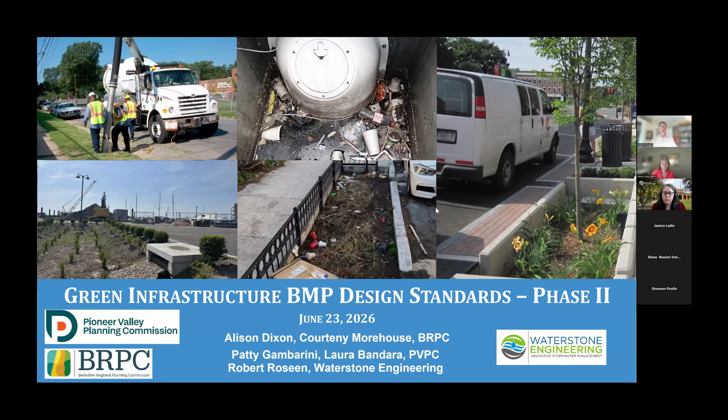So what we're going to do today is review phase two of the Green Infrastructure BMP Design Standards, which is essentially a library of relatively simple green infrastructure designs intended to be off the shelf - things that a road agent or highway superintendent could implement, simple drainage infrastructure elements that don't necessarily require heavy duty engineering.

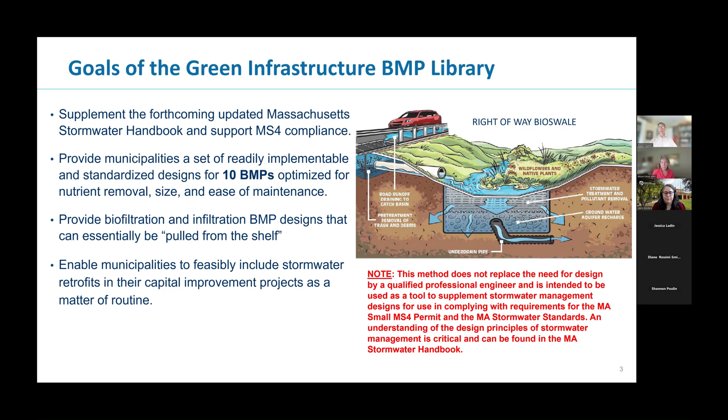What you'll see in the library is 10 standardized BMP design templates. I'll go through these - they include elements for different catchment areas, for different sizes, tables of the BMP dimensions, and information about BMP performance for removal of contaminants, things like nitrogen and phosphorus, estimated costs of construction.

It's important to understand all of this stuff comes out of the Stormwater Center BMP performance calculator, which, for those of you deep into the MS4 permit, you'll see is one of the resources that the MS4 permit offers - that and the BMP performance curves.

We talked about pre-treatment in there, online versus offline systems, and then different soil types, from the sandy soils to the D soils. We'll get into all of that.

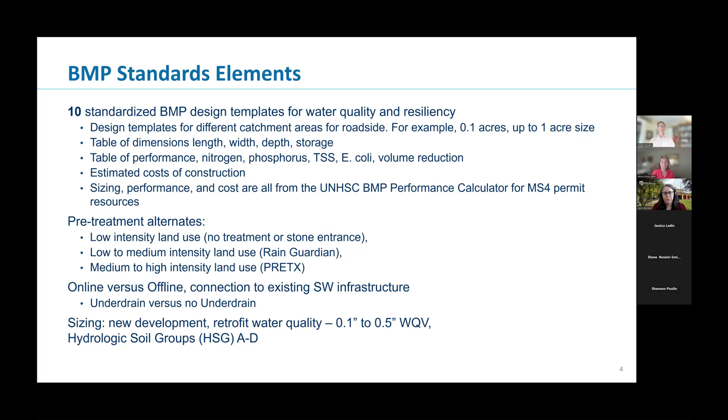So we had the first phase of this library where we did the first 5 BMPs done in 2023. Now we're doing the next 5 BMPs here in 2026.

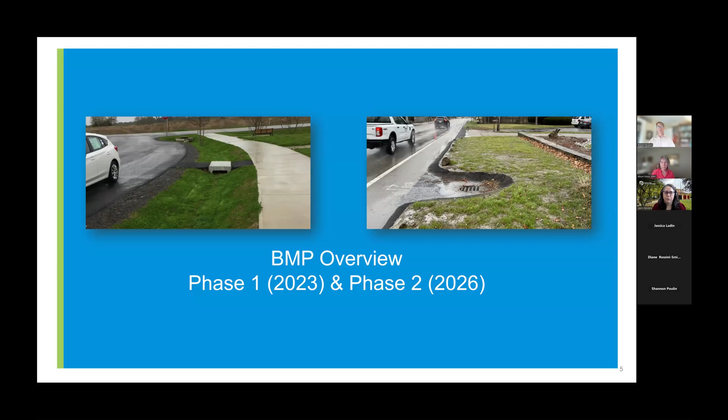The BMPs we're talking about include, on the left, a grassed bioswale - a very simple design intended to go in the right of way. This would be just a depression on the edge of the road, and depending on the level of intensity of the need for pretreatment, you may or may not have pretreatment in there.

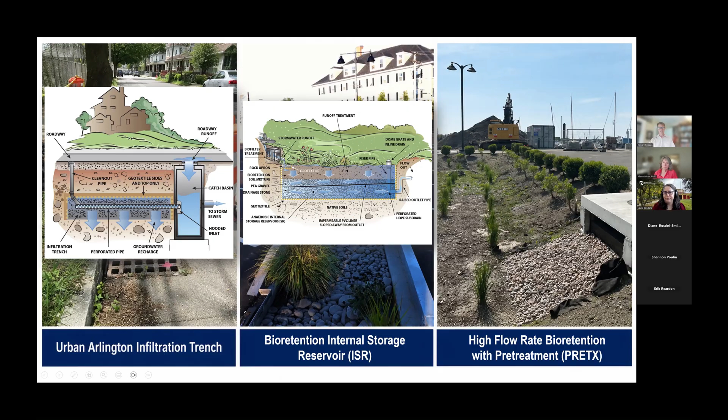But the other important part to understand is when you have a high flow rate media, it's much more prone to clogging, so they're much more sensitive. So the pre-treatment component of that is very important. What you see here is a pre-treatment system on the front side, a PRETX system where it's screening out trash and debris before it goes into that.

And so often what you'll see is you'll have the pre-treatment systems, and then you'll often have a structural underdrain. So what they'll do is put in things - basically they're like chamber systems. They provide storage underneath the system and greater opportunities for infiltration. So the cost is a little bit higher, the functionality is quite a bit higher as well. They're really great systems.

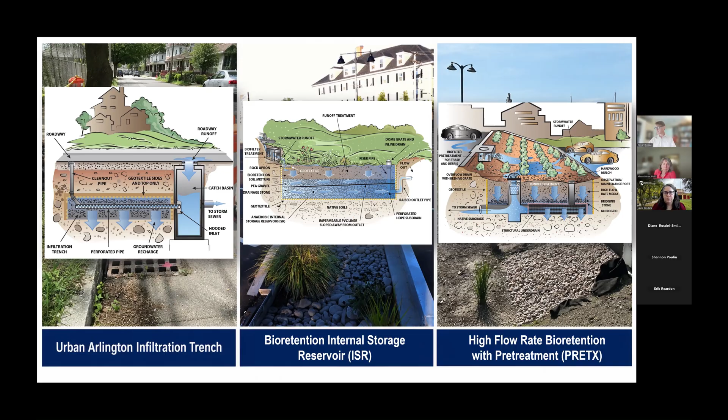And then we're adding some fairly simple systems here. Rooftop infiltration with pretreatment, so incredibly low cost. This is an example of a system being built as part of a residential subdivision. Every house in this subdivision has this, and I don't remember the volume of stone, but let's say it's maybe 3 or 4 or 5 yards of stone. So the cost of stone is maybe $300.

And then you have somebody to dig a hole and wrap it in fabric. So these systems are often going in for $2,000 to $2,500 per household, and they're managing up to the 5 year, even 10 year storm event in the stone. Very, very simple, very important,

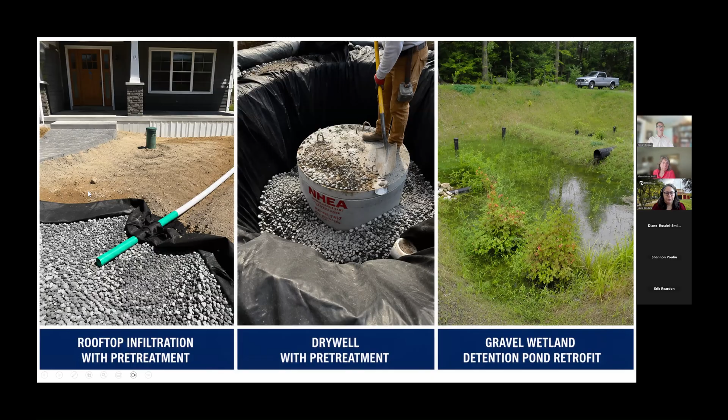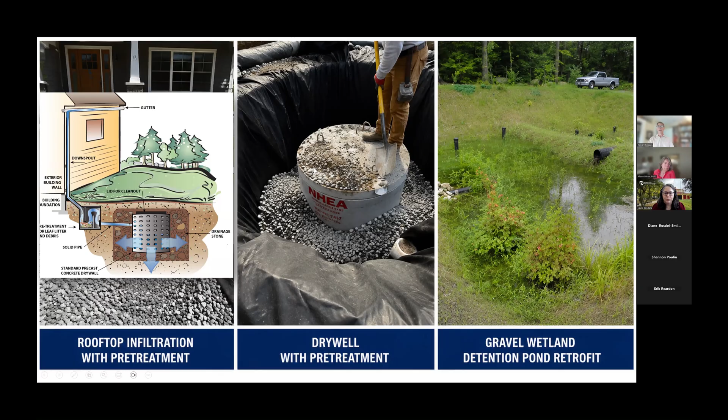and really easy to implement. Same thing with dry wells - let me go through this. This would be for a residential setting or something with just clean rooftop runoff, so kind of a very low trash and debris load. And then this system is more of a dry well with pretreatment, which might be intended more for parking lot runoff where the pretreatment demand - the trash and debris load - is going to be a bit higher. You wouldn't put it straight into a dry well or an infiltration trench; it really requires a higher level of pretreatment on the front end.

And then lastly, these are retrofits. Gravel wetlands - we spoke about these a little bit earlier. These systems can be great as a retrofit of existing ponds. Ponds have been around forever. If you have locations with dry ponds, a dry pond is typically designed for flood control, so they're often sized for the 10, 25, even larger storm events.

And so you have a large basin, an existing area, and then in the corner of it where the outlet is, you can retrofit it with these gravel wetlands. With a slight modification of the outlet control structure, you've changed your pond from having a modest level of water quality treatment to being one of the highest performing systems we've got, which are these gravel wetlands.

They're easiest done for dry ponds, but if you had a wet pond you could also do it there. You would just need to fill the wet pond, get rid of that permanent pool of water, which isn't really a big deal other than the fact you need to bring in fill. But in terms of flood storage and water quality treatment, there's nothing lost - we end up increasing the overall level of performance.

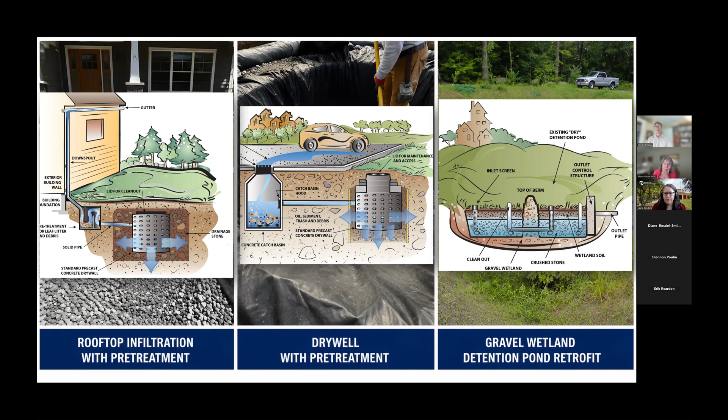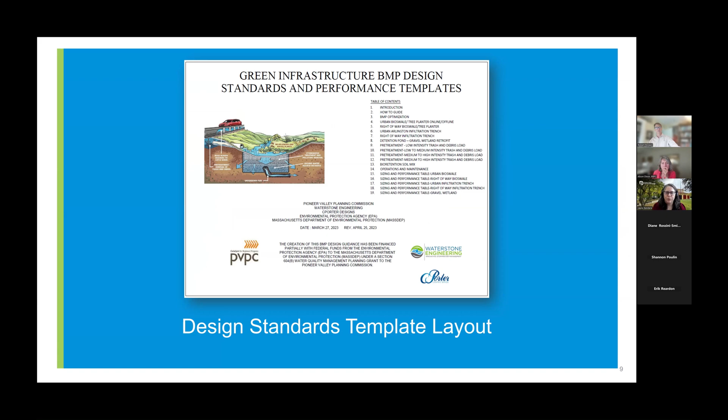Okay, so now we're gonna shift into what the library itself looks like, to give you a sense of how you will use this library and implement it in your day-to-day operations. So this is what the 2023 library looked like - it will have a facelift for the 2026 library. But this is an example of one of the sheets you would find in there, the urban bioswale or tree planter.

So what you see is you have a plan view on the top, then you have these sections through the middle. This gives you almost everything you need to build the system. There are specifications that go with this, dimensions, etc. Some of this is followed up in the sizing tables, which I'll show you next.

As an example, what you see here is it's showing on the top, for example, this would be implemented in a sidewalk, so you'd have a sidewalk cut. You then would have a fence. They don't always have to be fenced, but if you want to do that, you can have a fence around that. It really depends on the depth of the system.

This particular system has the option of being built in an online or offline configuration. So if you're in an area that has a lot of catch basins or existing stormwater drainage infrastructure, you can have these under drained and tap into the existing storm drains, or they can be done where there's a curb cut on the front and a curb cut on the back. So when they fill, they simply bypass through the system and back out, and flow down to the next storm drain or whatever else is in the roadway.

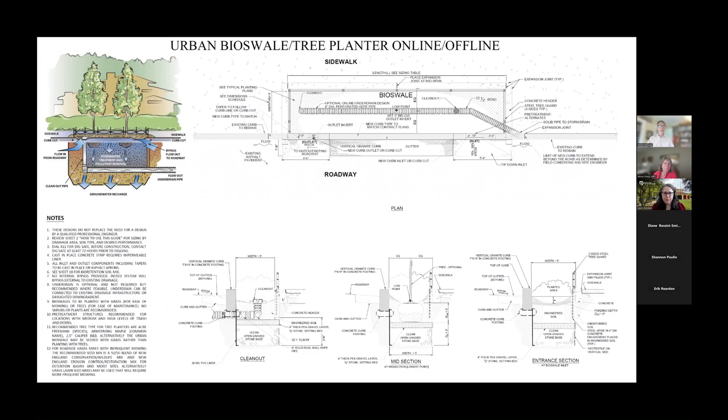But first, I want to talk about the considerations that go into this.

So first I want to talk about considerations that you have to do when you're looking at the sizing of these. Some of you may know this, but it's important to understand the context of why we're doing this and the limitations that municipalities experience for budget and otherwise.

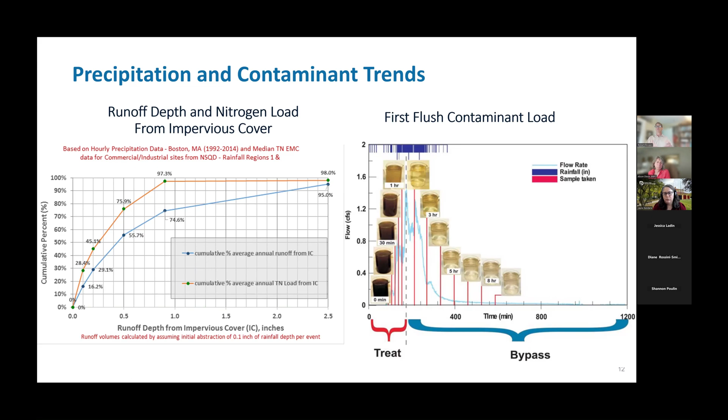This phenomenal figure was made by a guy named Masoud Kayhanian at UC Davis, a wonderful stormwater scientist, and they monitored this for Caltrans. Their storms are a bit different than ours because their climate's different, but you can see the storm that happens in the beginning—these are real pictures—it looked like tar, and by the 30-minute mark it's starting to clean up, and by the 8-hour mark it's completely clear. So the concept is the same; the timing is different. In our environment in the Northeast, where it rains frequently, we get most of our nitrogen and phosphorus in the very beginning of the storm.

So now let's talk about this from the concept of BMP optimization. BMP optimization is the idea that you're going to have a lot more bang for your buck if you're building systems sized for smaller storms rather than larger storms. So I want to show you how that actually works out in terms of BMP performance.

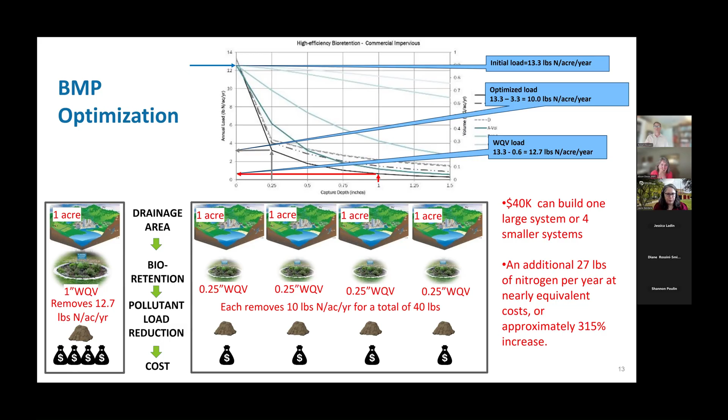So whether people realize it or not, it's actually in the MS4. There's a requirement in the MS4 in section 2.3.6, which talks about how redevelopment needs to be optimized for nitrogen and phosphorus. It goes through that description. And I'm going to show you a really quick example.

I'm not going to spend a lot of time on this, but this is an example of a site that was actually built. We had one system that we sized for a 1/4-inch water quality volume, and it was treating about 4.5 acres. We had another system we designed for 3/4 of an inch of water quality volume for about 1.6 acres.

We were able to achieve, in that same example, a 76% nitrogen reduction and a 95% nitrogen reduction for those two systems at a relatively low cost, $34,000, at some really good costs.

If you did a lot of this, you'd recognize that nitrogen treatment at a wastewater plant, to get down to about somewhere between 4 and 8 milligrams per liter, is costing about $3,000 per pound of nitrogen per year. So when we get below or around $3,000 per pound of nitrogen, we're doing really well.

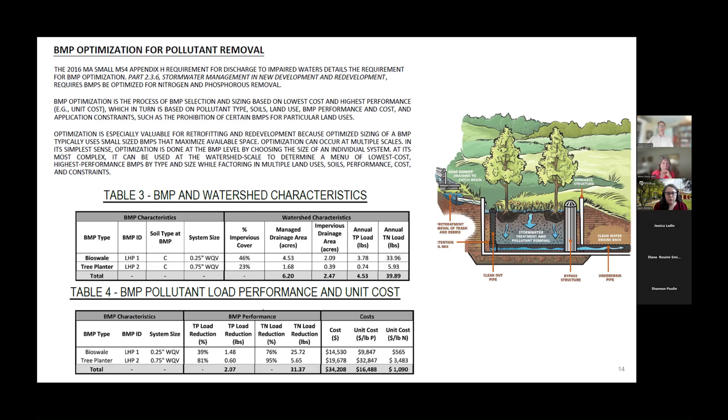Okay, so now we're going to go into the design method. And if anybody has any questions, I know it's a lot of information, but this is the context and sort of the underpinnings for the design library.

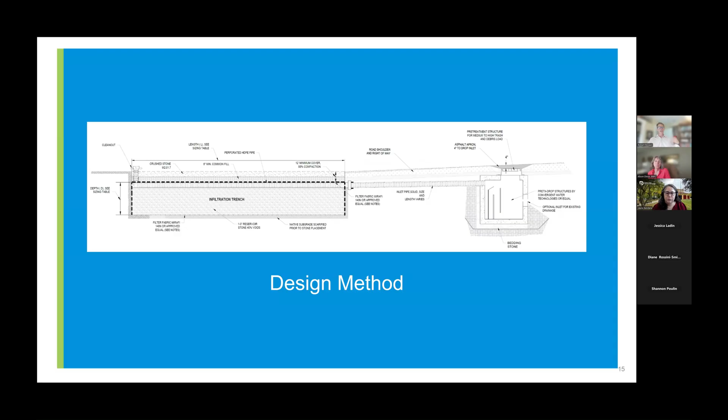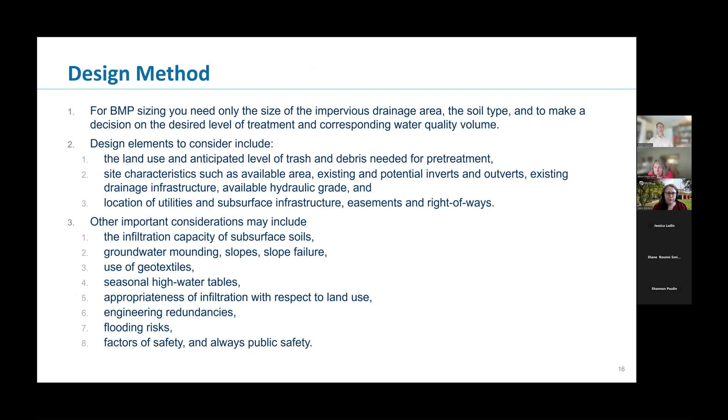So the design method, basically, you're going to go into the assessment of the... actually, I'm going to skip past this, we're going to do it here. You're going to go into the...

You're going to go into the evaluation of the location for stormwater management retrofit. Allison, did you have a question?

So to do that, you're going to assess where is this thing going to go. Is it in the right of way in a suburban or rural area, on the edge of the road where we have lots of room, or is it going to be in more of an urban setting, where we have less space to operate and we're probably dealing with a lot of utilities?

We need to consider our setbacks for things such as septic systems and drinking water wells, or from resource areas, water bodies. Are we within the 100-foot setback of a protected water area? Are we triggering the Wetlands Protection Act?

Then we need to determine our drainage area, or more precisely, our impervious cover drainage area. Then we would look at our hydrologic soil group and our seasonal high water table. Sometimes this involves test pitting, but if it's in an area you work in a lot, it's not always necessary. You can get a fair amount from the NRCS web soil surveys, or if it's an area you know, you may simply confirm it during construction.

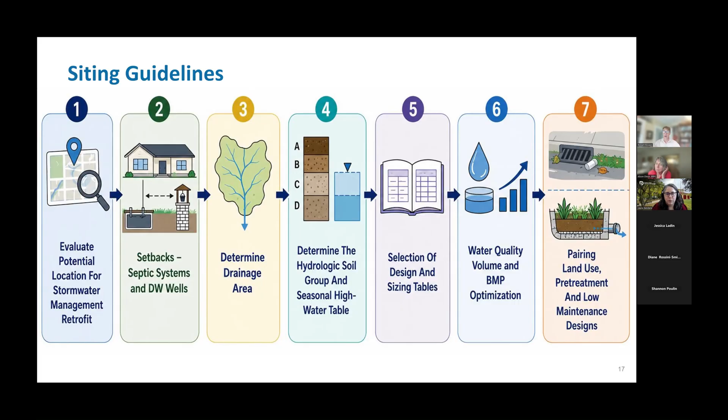So first, I want to go into an example. I'll do this example for you, and then we're going to try to do a group exercise and get folks to weigh in here. So I see Jessica and Diane - I'm going to put you on the spot if you're interested, and if not, that's fine. We'll get out of here a little early.

So the first one is an example of an urban bioswale retrofit. What I want you to think about here: imagine a design scenario in an urban environment where we have a two-lane roadway, roadside parking, sidewalks, curbs, gutters, and existing drainage infrastructure.

So in this case, what I want to do is pick an offline urban bioswale with no underdrain. Why would I do that? It's going to be very close to what you see in the bottom of the system here, and the reason it's offline is because I'm going to try and limit cost, if I don't have a lot of money to spend for this particular example.

So what I'm going to do is have a curb cut at the front of the system where it's going to allow water to flow into it, and then when the system reaches capacity, it's going to exit through a curb cut at the back of the system and drain right back into the road, and maybe another 100 feet down it'll go into an existing catch basin. I'll have a pre-treatment system ahead of it to capture all the trash and debris.

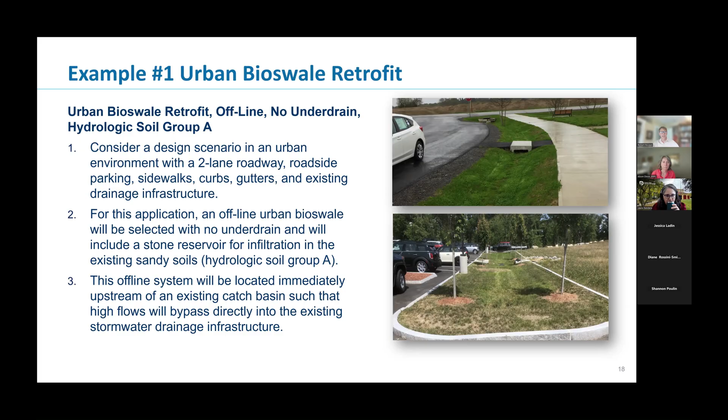Now I want to show you how you would use the sizing table. Remember that big complicated chart I showed you with columns of BMP and drainage area? This particular example I'm picking for a half acre impervious area, so half acre road runoff. That's probably a two-lane road, most likely crowned in the center, so I'm just doing one side, and often we have 200 or 300 feet between catch basins. This instance is for hydrologic soil group A, so sandy soils.

So we have our impervious drainage area, then the way we read these is you have your BMP sizing. We'll talk about that in depth, but I want to go through an example here. There are three elements: your treated area equivalent, so in a 1 inch water quality volume you're essentially treating the entire impervious area, down to different sizing — 3/4 of an inch, half an inch, and so on — and what the treated area equivalent and depth of runoff treated would be.

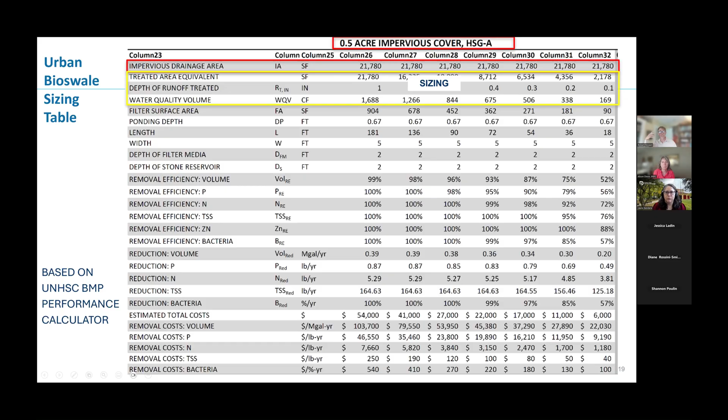So, remember back to the optimization example? Am I sizing it for a 1 inch water quality volume, or something less, anywhere from 1 inch down to a tenth of an inch? And then what that corresponding water quality volume will be — what is the size of the capture volume in that BMP. For a 1 inch, it's fairly large, maybe 1,600 cubic feet versus maybe only 169 cubic feet. So that's where the sizing element gets in, and we'll go into this — this will hopefully begin to make sense.

So what this shows you is if I pick something for a 1 inch storm, the length of my bioswale is going to be 180 feet long, which might be fine in a rural area with plenty of room along the road shoulder. In an urban setting, it's less likely. Down to a tenth of an inch, I might be able to do this in as short as 18 feet. And then we've standardized the width and the depth of these systems.

Now, we haven't done this in the sizing tables, but you could recalculate this on your own if you said, okay, I'm going to make this 10 feet wide. If it's 10 feet wide, then instead of 180 feet, it's going to be half that distance, 90 feet. Or I want to make the depth of the filter media twice as deep — now you're changing your volume, and you can change your length too. So it enables you to rework those numbers if you want. If you're heavily reworking them, I'd recommend you get the UNHSC BMP performance calculator. We don't have time to go into that today, but understand these numbers are generated from that calculator and from the BMP performance curve and these complex models that have been run, now standardized into outputs.

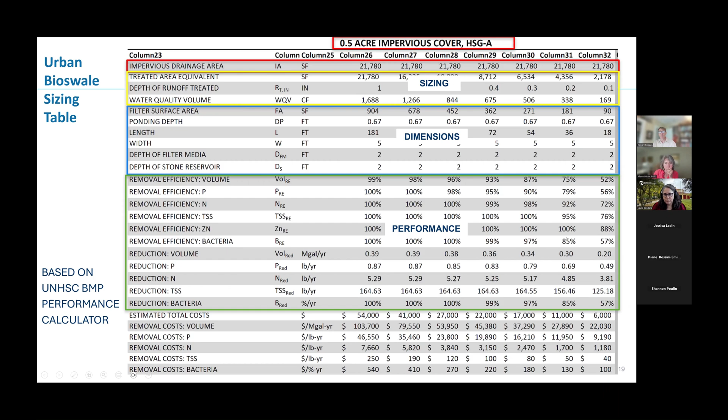Then the next piece gets into performance — what is your removal efficiency, both in terms of percentages and in terms of what your actual load or volume reduction would be. So again, our 1 inch example, I'm getting essentially 100% removal efficiency for phosphorus, nitrogen, total suspended solids. But down around the 2/10 of an inch, we're in the 80% or 90% removal efficiency range, which is still very good, and costs a fraction.

And then the last bit, the planning costs. Remember, these are not construction costs, so when it comes to bid or actual construction, you need to reassess these numbers. And by the way, these numbers are going to be updated as part of the 2026 BMP library.

And you have a cost to construct in the top row, and then you have unit performance costs. These are a bit more esoteric, but understand these are the costs of pound removed. So you might remember I told you in that prior example, we were down around $1,000 per pound of nitrogen removed.

For the urban bioswale, at 2/10 of an inch, we're down around 1,700 pounds of nitrogen, or $1,700 per pound of nitrogen. That's because in an urban setting, it's more costly. If I was in a rural setting, which was my particular example, these numbers would be about a third of that.

Okay, so now I want to run this example again. For this particular BMP in the urban bioswale setting, I'm going to pick 2/10 of an inch. In that example, I'm going to have a filter surface area that's 180 square feet. My ponding depth is going to be, I think, 8 inches. My length of my BMP is going to be 36 feet by 5 feet wide.

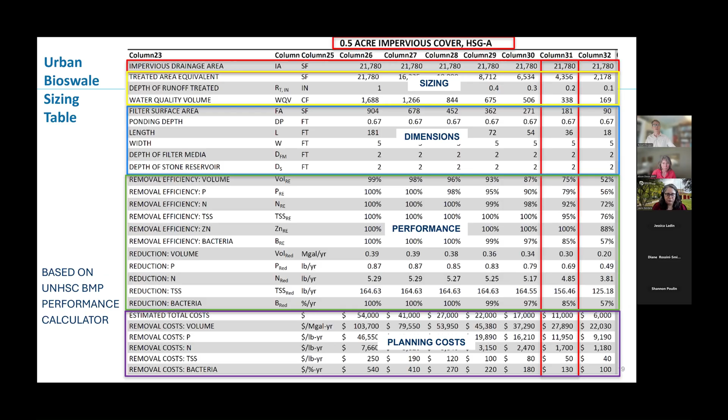So the first example I'd like to talk about, and I just built a whole bunch here, is a right of way for roadways. This was on a Mass DOT road in a municipality. Technically, the municipality is responsible for maintaining, or it's in the municipal MS4, but it's on a DOT road. So I don't always know how these things work. I know we had to permit it through the DOT, and I think the DOT is responsible for the maintenance, but the town paid for all of this. I don't know how it works.

But what I want you to think about here is we have an urban minor arterial. It's getting roughly 10,000 vehicles a day. It's a 35 mile per hour road. We routinely get heavy trucks. We have roughly 85% impervious cover within the roadways, and we're dealing with pavements, sidewalks, driveways, gravel shoulders. Oh yeah, and we're in a type A soil here.

So let's talk about this a little bit. If you think about your potential location, if you're looking at a road like this, where could you build BMPs? I can tell you that what you have on the left-hand side here is, oh, so there's a road crown. So everything on the left-hand side is going into storm drains, and they're untreated, and they're going straight out to ponds that are impaired, so they're on the impaired list. So they're getting nailed by the MS4. Everything on the right-hand side of the road is untreated and it's running down a long ways, and eventually it'll get to a catch basin, or it's flowing over the hillside down people's front yards.

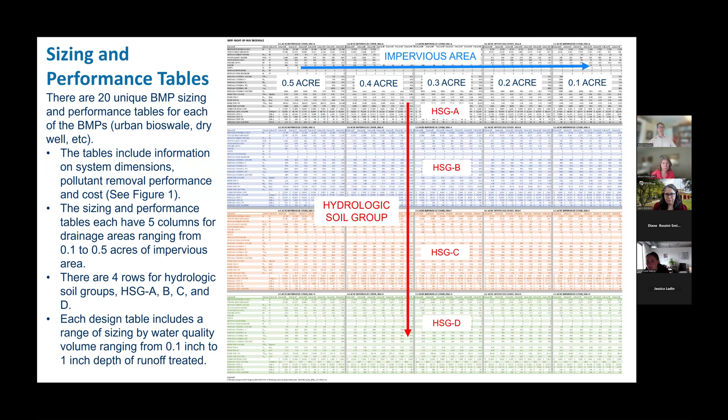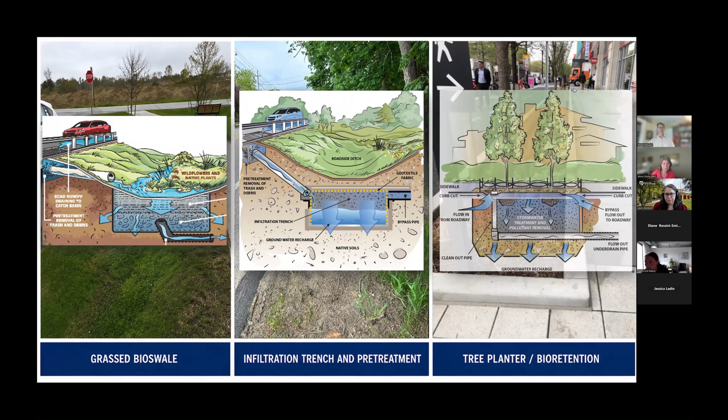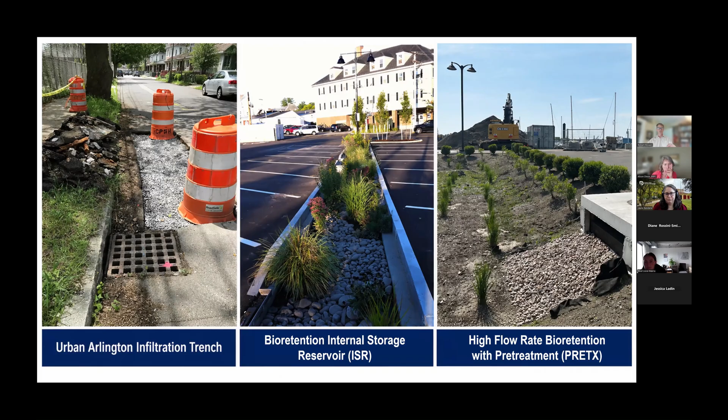Why don't I go back up. So for example, here's a bioswale on the left. We have an infiltration trench. And what else do we have? We have another one that would go below. So we only have two that are below ground surface here: an infiltration trench on the far left, the urban infiltration trench, and then the regular infiltration trench, roadside infiltration. So what do you think?

I'd almost go with infiltration trenches. Do we have the same right of way on the other side of the road, or is it at the sidewalk? It's under the sidewalk. So we do have the same right of way, but you'd have to disturb the sidewalk. I think it's 58 feet from edge to edge. You could put a 24-foot roadway in, but you'd have to break up sidewalk, so the project cost goes way up.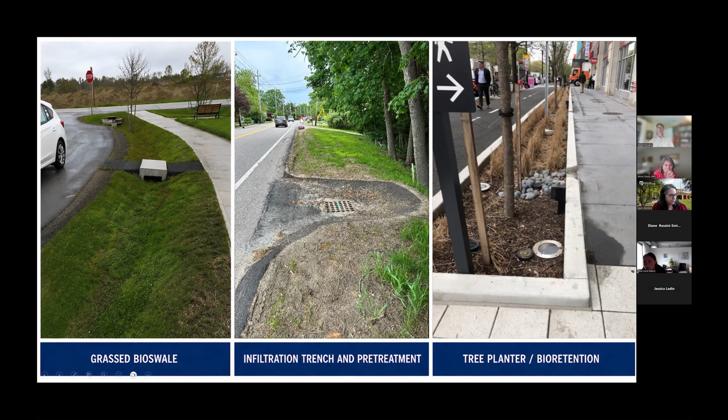So I'd almost go with maybe that infiltration trench with pretreatment. Yes, exactly. So that picture I showed you, see where this orange sign is down here? That's where they're building it. That's exactly what we chose. So we did exactly what you just suggested there. So let's get back to it.

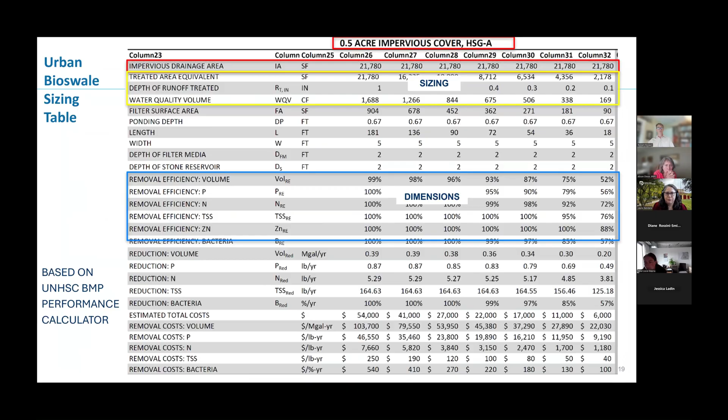This one. So the picture I showed you of the urban infiltration trench, that's about 1,000 feet behind me here. We put one in right here, I think, or maybe it's in front. I can't remember exactly where it is, but I think there's actually two in here. So, piece of cake, right? You have a catch basin with pretreatment that goes in, and we just picked existing ponding areas, where the water's standing. Then you put everything underground, resurface with gravel, and put cleanouts. So yeah, what other thoughts?

So let's think about setbacks, septic systems, drinking water wells. Any of that stuff going to come into play here? Hopefully there's no wells that close. I guess we would have to consider how much contaminants would be going in and how close the wells are. Yeah, so I think in this case, everybody's on municipal water, so there shouldn't be drinking water wells, and they're also on municipal sewer, so no setbacks here. But if we did have it, I honestly can't remember. I think it's 35 feet from a septic system, and 75 feet from drinking water wells. Does that sound right? It varies, I think that's locally determined, as opposed to state determined.

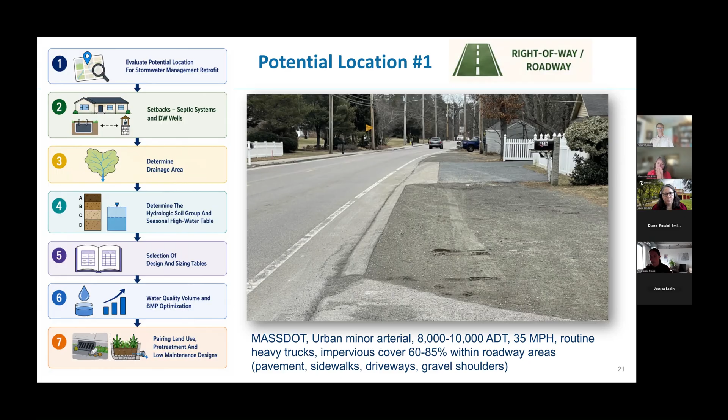In your area, do you guys do concrete curbs or granite curbs? It depends - it's a cost issue. Also, if we're doing bioretention or anything, we almost always put granite in, just because they're longer lasting, and if there's a drop in grade, we don't want to chance it with that kind of stuff.

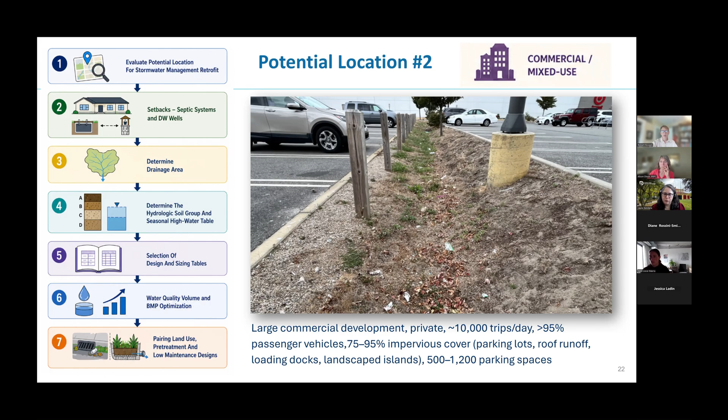So let's jump into - I'm realizing next time I do this, I'm going to sequence it differently. We're going to do that exercise after we do the pretreatment for trash and debris, because this and the O&M considerations to me are some of the most powerful things. You guys working in municipalities, this is the biggest nightmare that you worry about.

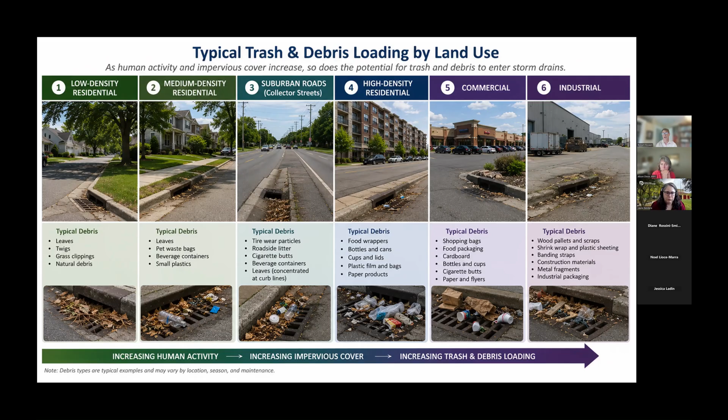Depending on where we are on this, I can't tell you how many times I've worked on projects where we've designed stormwater systems including pretreatment, where the owner, as a cost savings measure, has eliminated the pretreatment in favor of just a little gravel entrance or something because it's cheaper, and then it doesn't work.

This is where I think about the evolution of low impact development, and the analogy of a septic system. In a million years, nobody would consider building a septic system without the tank, because the leach field itself could function for a very long time if the tank is well maintained.

Stormwater infiltration is not a lot different, we have a trash and debris load. Think of your bioswale or subsurface infiltration as not substantially different from a leach field, as long as you have something that enables you to remove the trash and debris.

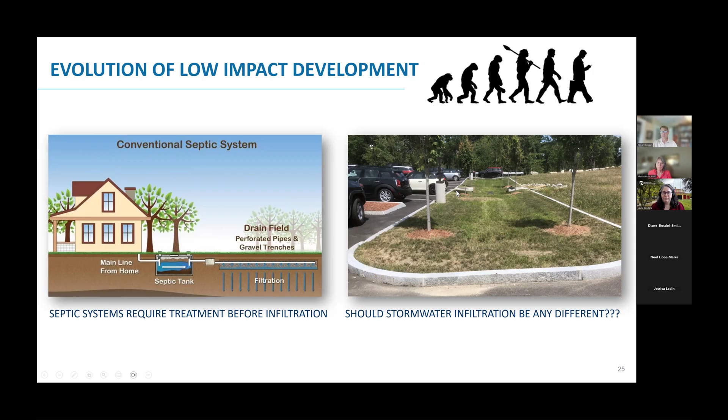This example has a pretreatment system that captures all the trash and debris off the parking lot. These were some headlines from the New York Times early on, where the city's system was called a pollution fighter, but for residents, it's an eyesore.

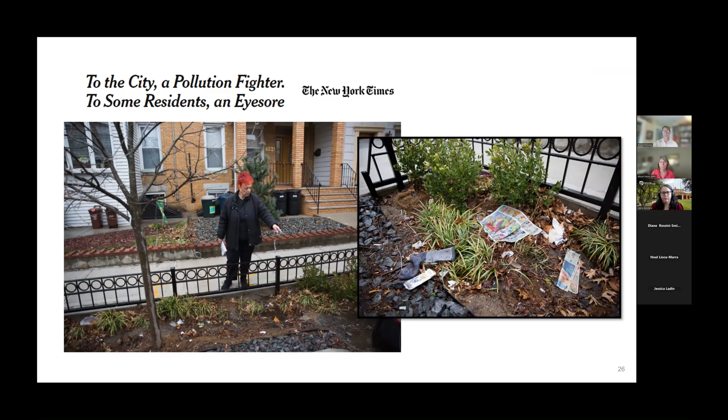Why that's important is because in a municipality, you're always playing the game of trying to get taxpayer support, and if they don't support something, you won't get money to do it. So it'd be hard to get support from taxpayers to do stormwater management that looks like this. I'm not poking fun at it, I've made these mistakes about a million times and I've just learned from them.

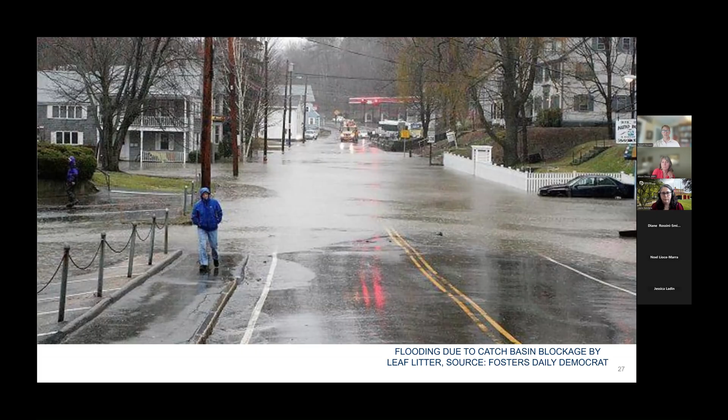I always like this example because it's not always aesthetics you're worrying about. This flooding was simply due to leaf litter out in catch basins, and it's in people's houses.

For low maintenance asset management, we need to recognize that most pretreatment is inadequate. Our goal should be to use existing staff and existing equipment, just use vactor trucks or whatever it is.

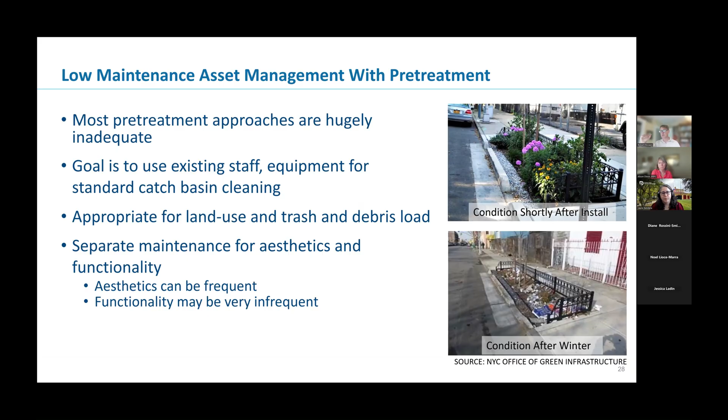Whatever we design needs to be maintainable by vactor trucks, and we want to avoid having to maintain for aesthetics. This system has to be maintained weekly or monthly not because it doesn't function, it still drains, but because it looks terrible.

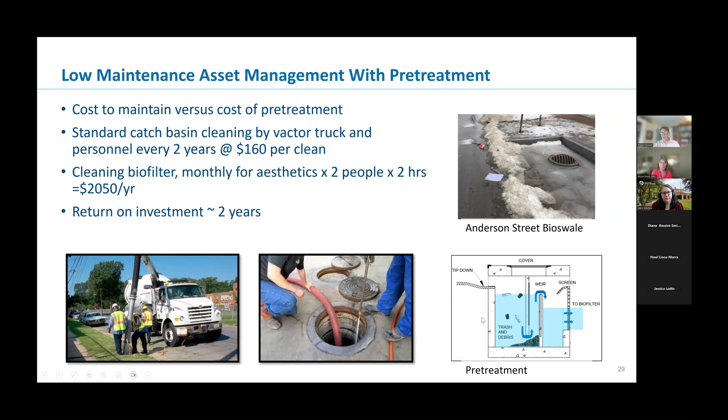As an example, we want to be able to use something like a vactor truck where you're only having to get in there every 6 months to 2 years, using a system that is capturing your trash and debris.

The different types of examples you have, your low intensity ones like stone check dams, might work fine for a rural or rural residential setting. But as soon as you get into low and medium intensity, you have to have systems that are actually capturing debris.

You see things like the Storm Sack or the Rain Guardian, these are good for low intensity areas with a little bit of trash and debris. A Rain Guardian does a great job in front of a rain garden, except it captures the trash on top of it. So if there's a high trash and debris load, at least it's not in your system, but it doesn't look good.

The good thing about a storm sack is that it's now going below ground. There's not a lot of capacity here, but since it's below ground, it's not an aesthetic problem. Then you get into the medium to high intensity cases where you have a lot more trash and debris, and these you can probably get down to a 1 or 2 year maintenance mark.

So Diane, as an example, how often in East Hampton are you maintaining your catch basins? Usually once to twice a year. Oh wow, you're that frequent? Okay, vacuuming, yeah. And for some of our bioretention, we have a couple with a pad before it, so they'll vac those out as well.

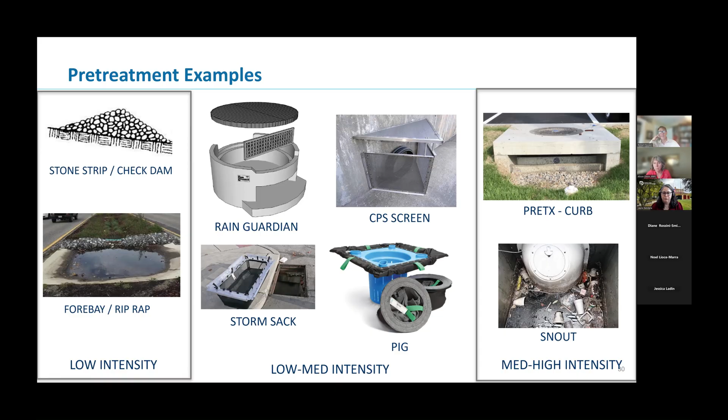Yeah, I've built a lot of bioretention that have not had sufficient maintenance. So there are bioretention retrofits you can do—or I don't mean actually retrofitting, you're not building a bioretention, but a retrofit for O&M that you can do. So we can talk about that.

So we have like a sediment pad before it with a weir, so they vac those out as well, because they're made out of pavers and they're grouted in, so we don't have to worry about backing up the sand. Oh, that's nice.

Because if you think about the O&M, ideally all you're doing is vacuuming, right? There was a guy—terrible with names—in one of our advisory group meetings who said they were doing, god, what were his numbers, like 20 a day, maybe more. That's impressive. I remember with some of these systems we were down to maybe 6 to 8 a day, so 20 plus a day is really impressive.

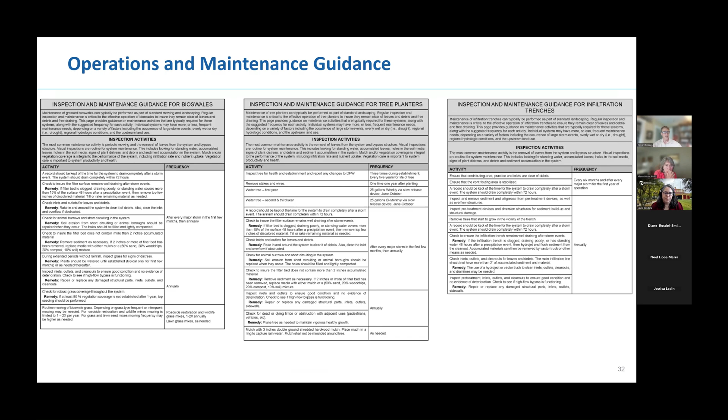And that's driving costs way down for you then. So one of the things to know with these standards is that each BMP comes with an operations and maintenance checklist—recommendations on what you're looking at, the frequency, and how that should be done.

And then the other thing to recognize is the need for construction inspection. When we think about advanced stormwater management, which is what these are, it's not just the designs, it's also building them to make sure they're done right. This particular photo is an important one because it's an example of the inspection coming too late.

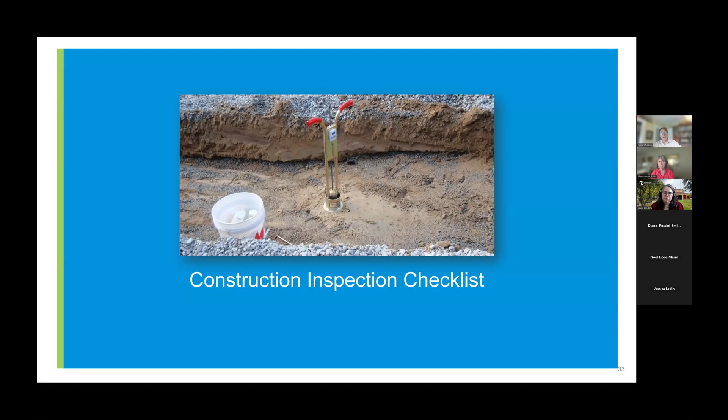We were notified by the builder afterwards, so we went in and inspected. The stone was already down, so we scraped away the stone and did our infiltration testing on the subgrade, and they had overcompacted it—it didn't drain. So unfortunately they had to scrape off all the stone, dig down a foot past the compacted layer, and retest. The infiltration was fine down there, but why that's important is because had we not done that, the infiltration BMP never would have worked.

So what you will see is a construction inspection checklist. They're all fairly easy, but they're things we can all do. Depending on the level of complexity, you'll have pre-construction elements, excavation elements, elements of how the structural components are going together, evaluation of your select material—what does the stone look like, is it clean, filter media specifications, things like that—and then all the construction completion elements, sign off and evaluation, all that.

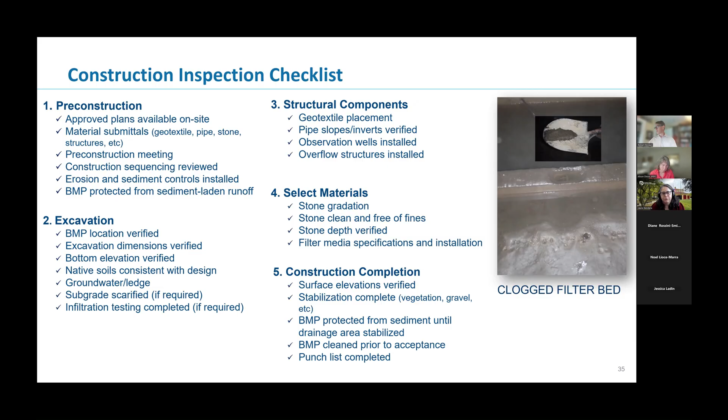So what else have we got? Okay, lastly, I want to talk about some resources for you. We have the phase one BMP design standards currently located on the Think Blue Connecticut River website, and when this project is complete, we'll have a new link for both Pioneer Valley and Berkshire Regional, with the revised and updated standards.

You can also contact me if you'd like access to the CAD files, if the standards themselves aren't sufficient and you want to modify the CAD files and do whatever else you want with those.

There's also the UNH Stormwater Center. You can get access to the BMP Performance Curve Calculator. There are some other links that are out there through the MS4 permit. And then, of course, the planning commissions—you can contact them for stormwater support.

Lastly, I'd like to acknowledge our advisory group, both from the Berkshire region and the Pioneer Valley. Your input has been exceptionally helpful. Over the years, the different designs I've done, I learned early on that engineers are very good at solving one problem and creating two. So working with the people who are building these systems and the people who are owning and maintaining these systems helps us come up with designs that are practical, feasible, and usable. We're very grateful for all of that.

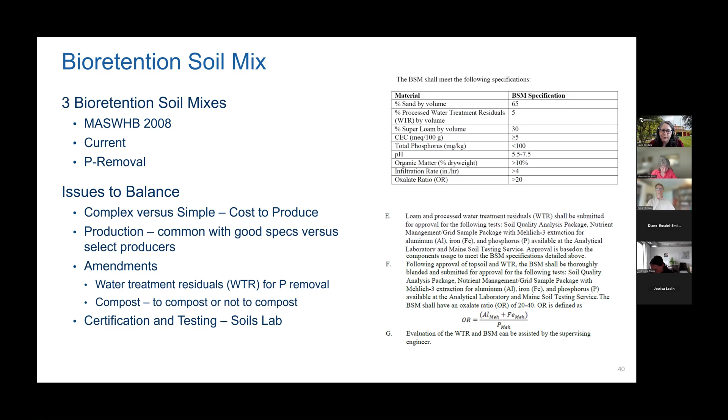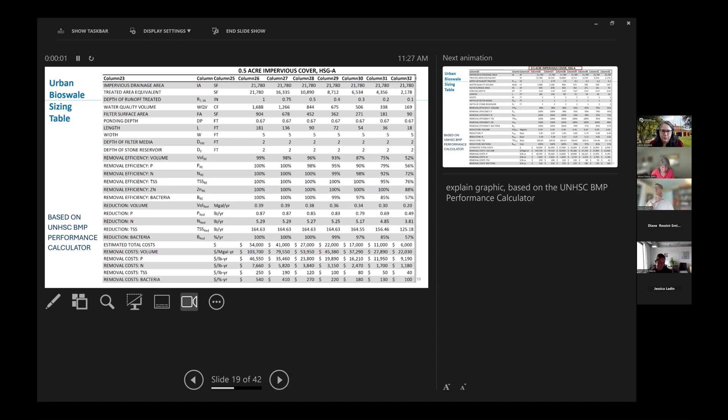It's a really good question, Laura. There is, yeah. So what I'm going to do is quickly jump out and go back in here... I'm going to swap.

This is a tenth of an inch up to an inch, and the different drivers here are: some areas that are mostly freshwater driven are kind of phosphorus based, so you might have phosphorus TMDLs. Other areas are nitrogen TMDLs, so you'd be more interested in what the nitrogen removal is.

And then there are different standards in the MS4. A lot of the MS4 standards - does anybody remember off the top of their heads what the numbers are we're looking for? I feel like it's 80, 60, 50, but I can't remember. So 80 TSS, 60 nitrogen, 50 phosphorus is what they're looking for with the retrofit standards.

So if it's 80, 60, 50, a 0.2 would get you into that range - you'd be surpassing the 80, 60, 50 range. A 0.1 would not.

So that's one simple reason. The other reason, Laura, is that it's always a safe bet to oversize things. If you have the money and the space to oversize, what that means is you're extending the life of the system, and you're probably reducing your maintenance intervals too.